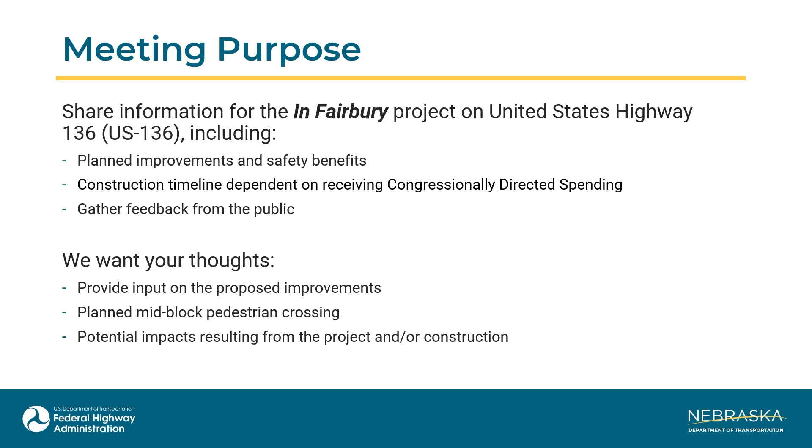Identified as in Fairbury, the proposed project would repair approximately 0.4 miles of concrete pavement along US 136, starting just west of the viaduct over the Union Pacific Railroad and extending east to just beyond the intersections of US 136 and Tilden Street. No work would be done on the railroad viaduct.

It would also reconstruct approximately 1.2 miles of US 136 as a 3-lane roadway starting just east of Tilden Street to just west of L Street. The 3-lane section would consist of a center 2-way left turn lane and an eastbound and westbound through lane. Construction may begin and/or end approximately 500 feet ahead of or beyond the actual project limits to accommodate transitioning the pavement.

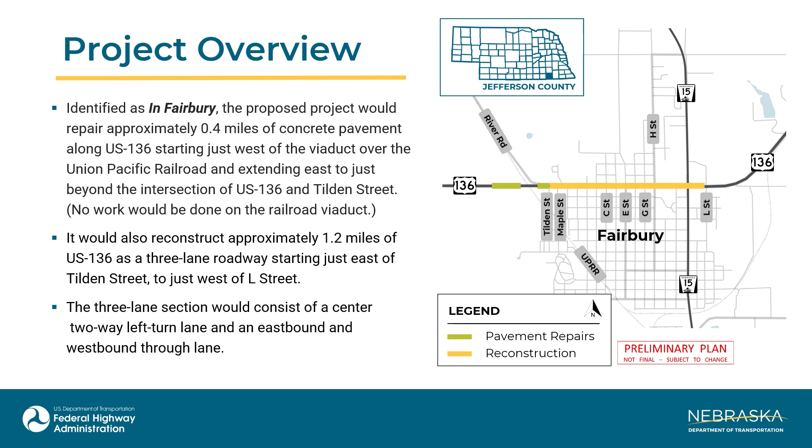The purpose of the proposed project is to preserve the transportation asset, improve the reliability of the transportation system, and perpetuate the mobility of the traveling public. The need for this project is based on the current condition of the roadway.

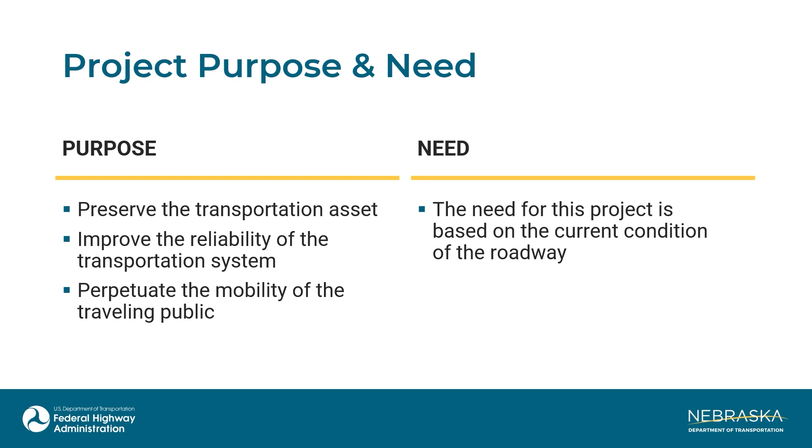We are now in the public engagement process, and we want to hear from you. Stakeholder meetings were held this week with a cross-section of Fairbury representatives comprised of the public sector, civic organizations, businesses, and residents on US 136. The comments received are being evaluated as part of the design process.

This public meeting is an important part of the project process. NDOT will evaluate and respond to all public comments received during the comment period, and the project design will be refined as appropriate prior to starting the right-of-way appraisal and acquisition process anticipated in early to mid-2026.

The proposed project would require the acquisition of additional property rights, which could include new right-of-way, control of access, permanent easements, and/or temporary easements. If your property is impacted by this project, you will be contacted by an NDOT representative once the design footprint has been established.

Final design and construction plans are anticipated to be completed by late 2026. Construction is dependent on receiving congressionally directed spending, or CDS. If CDS is received, construction could begin as early as spring of 2027, with completion anticipated by winter of 2027.

US 136 would be reconstructed and reconfigured through Fairbury. A roadway reconfiguration is also known as right-sizing the roadway. It reconfigures travel lanes to provide space for other needs. Currently a 4-lane highway through Fairbury, US 136 would be reconfigured to a 3-lane section with a center 2-way left turn lane, and an eastbound and westbound through lane.

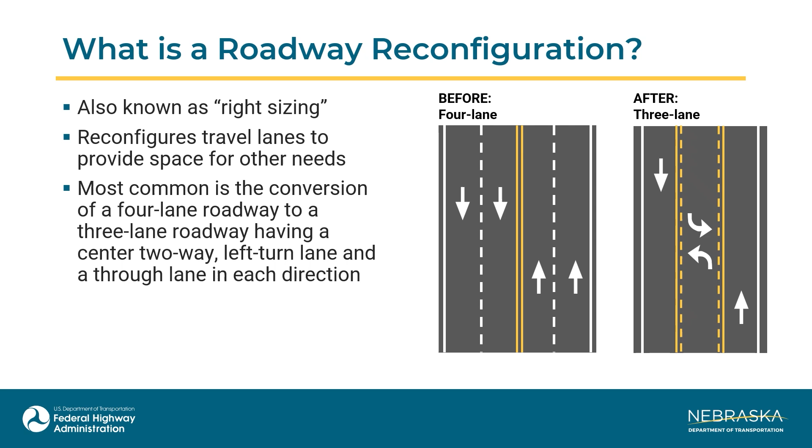Roadway reconfigurations offer several safety benefits. The addition of a left turn lane reduces the risk of rear-end collisions and provides better visibility for those turning left, as shown in the graphic on the screen. A single lane of traffic in one direction also makes it easier for those turning onto US 136 or traveling north or south to find a gap in traffic.

Reconfiguring US 136 to 3 lanes provides space for the addition of sidewalks on both sides of the highway. It also reduces the distance pedestrians must travel to safely cross the highway. National studies performed by the Federal Highway Administration have found that roadway reconfiguration reduces crashes by up to 47%.

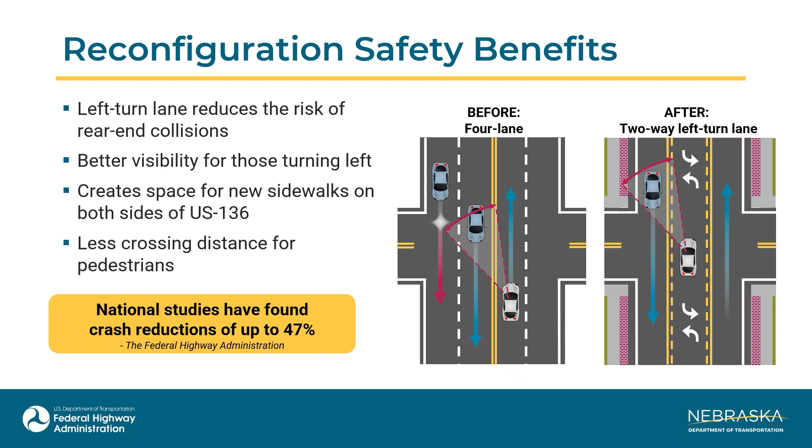Next, we'll be walking through the proposed improvements for US 136, beginning with the typical section. Typical sections are a cross-section or a driver's perspective when looking at the roadway. This slide illustrates the proposed roadway reconfiguration from the existing 4-lane section with a raised median to a more efficient 3-lane section. It includes a single lane in each direction with a dedicated 2-way center turn lane, which enhances traffic flow and safety for turning movements. There will be no shift to the existing highway centerline.

The existing US 136 layout includes 2 travel lanes in each direction and a 15-foot raised median totaling 66 feet in width. The proposed redesign utilizes the existing roadway footprint while improving functionality. Importantly, this reconfiguration allows for the addition of sidewalks on both sides of the highway, along with an imprinted concrete buffer space, improving pedestrian accessibility and safety. The proposed design represents a more balanced use of space that provides safety benefits to both drivers and pedestrians.

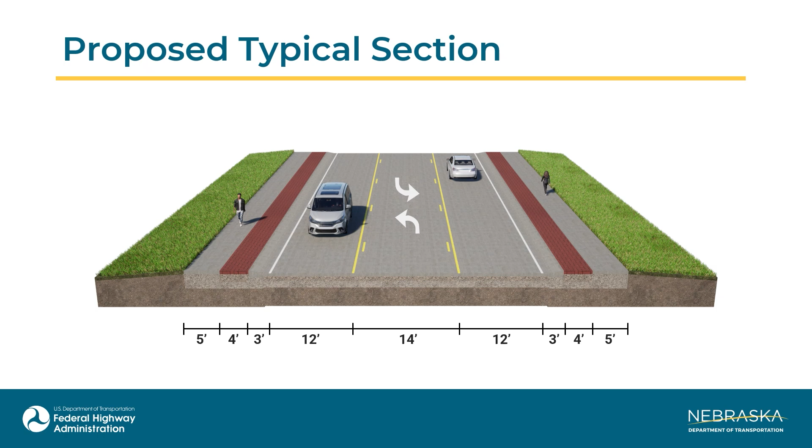Next, let's walk through the detailed improvements for the reconstruction of US 136 beginning at the west end of the project. From Tilden Street to Elm Street, the roadway would be reconstructed on the existing alignment and reconfigured to be a 3-lane section with 1 lane in each direction and a center turn lane. Limits of new pavement are shown in gray. New sidewalks are shown in pink and would be constructed on both sides of the highway starting at Maple Street and extending east to L Street.

Some properties with multiple access points onto US 136 would have driveways consolidated or removed. These locations are identified with an X on the map. Locations with limited visibility have been identified for driveway consolidation to improve sight distance. Consolidating direct access points onto US 136 also helps to minimize potential conflict points.

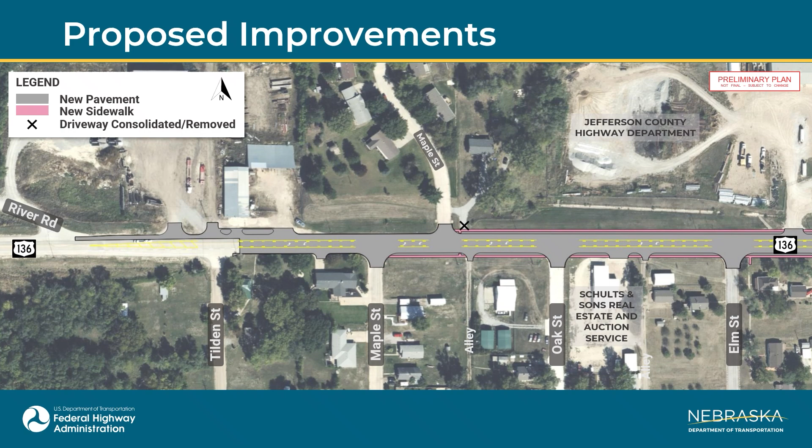East of Elm Street to west of D Street, the 3-lane section would continue on the existing alignment. New sidewalks would be added to both sides of the highway through this section. Intersections and driveway approaches would be reconstructed as needed. Storm sewer inlets throughout the corridor would be reconstructed to improve roadway drainage.

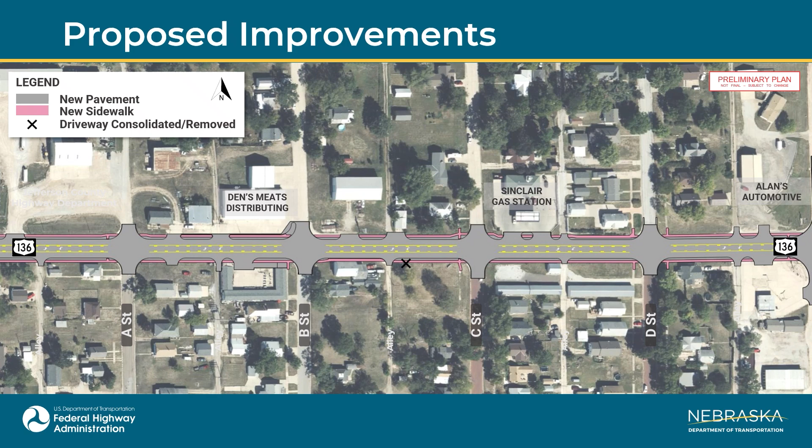East of D Street, the existing raised median would be removed to make room for the 3-lane sections and sidewalks on both sides of the highway. Between D Street and F Street, the US 136 vertical profile, or grade, would be raised approximately 18 inches at the intersection with E Street to meet current sight distance requirements. A new crosswalk between G Street and H Street would be installed. We will discuss the crosswalk in greater detail later in this presentation.

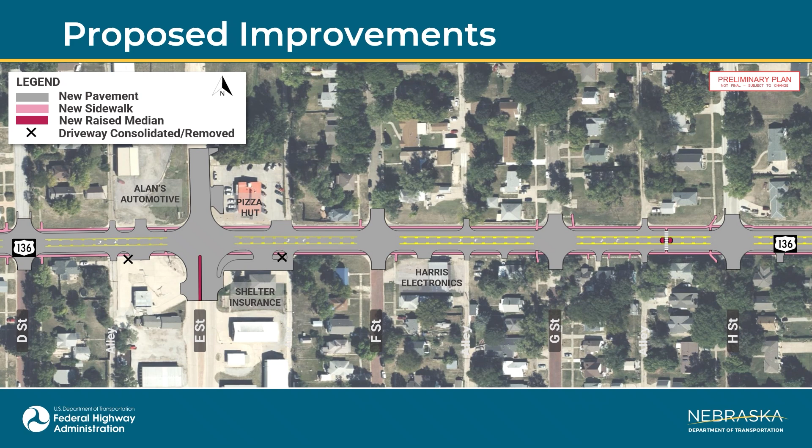From H Street to the junction with Nebraska Highway 15, referred to as N15, the existing raised median would be removed and the proposed 3-lane roadway would be constructed on the existing alignment. Sidewalks would be constructed along both sides of US 136. New raised medians are shown in red. Raised medians would be reconstructed on US 136 at the junctions with N15 to increase safety by separating conflicting traffic movements at the intersection.

McNish Park borders the south side of the project between H Street and J Street. Minor right-of-way impacts are anticipated for culvert work. The park would remain open throughout construction. Section 4(f) of the U.S. Department of Transportation Act of 1966 requires a federal agency to consider the effects of actions on publicly owned parks and recreational lands. NDOT anticipates the project will not adversely affect the activities, features, or attributes of the park. Public comments regarding the potential impacts to McNish Park are being accepted at this public meeting.

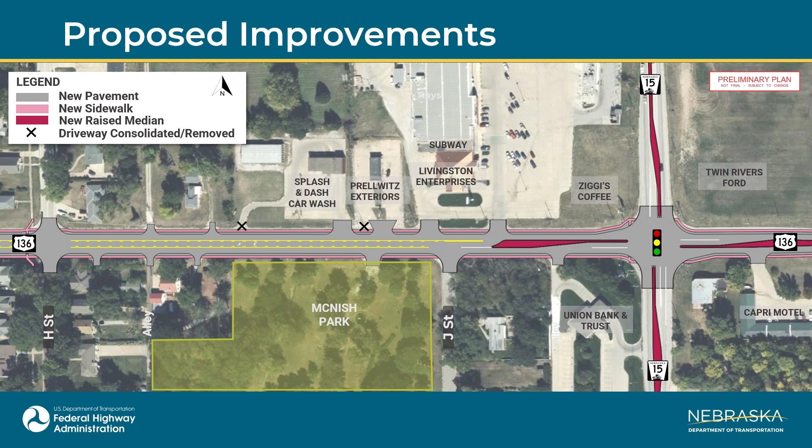The existing raised median along N15 would be removed to allow for the intersection of N15 and US 136 to be phased construction, building half of the roadway at a time. After the construction of the intersection, new raised medians shown in red would be constructed at the locations where the previous raised median had been removed. The project would reconstruct US 136 to the west side of L Street, where the roadway tapers down to meet the existing 2-lane roadway section.

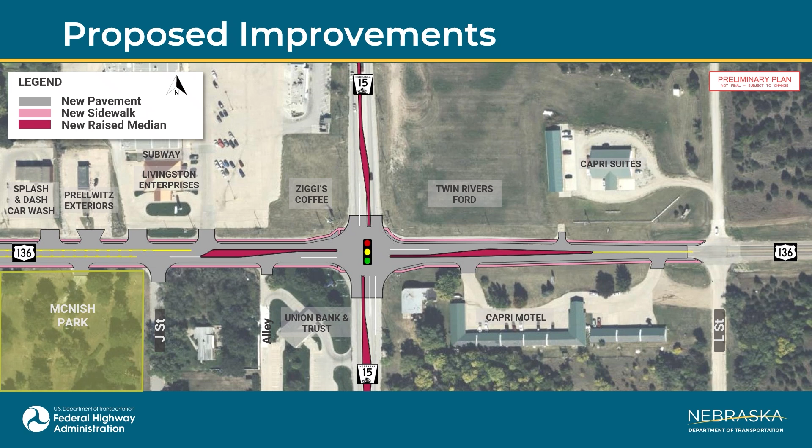Project construction is dependent on receiving congressionally directed spending, or CDS. If CDS is received, construction could begin as early as spring of 2027, with completion anticipated by winter of 2027. During construction, traffic on US 136 and N15 would not be detoured. 1 lane of traffic in each direction would be maintained. Construction would be completed in 3 phases, 1 lane at a time, beginning on the south as shown in red. We'll share more about each phase of construction in the following slides.

Not more than one of the following intersections would be closed at the same time: Maple Street, C Street, E Street, and H Street. Reconstruction would be limited to approximately 4 segments. Local vehicular and pedestrian traffic would be able to cross the highway at intersections not under construction. Access to businesses and residences would be maintained but may be limited at times.

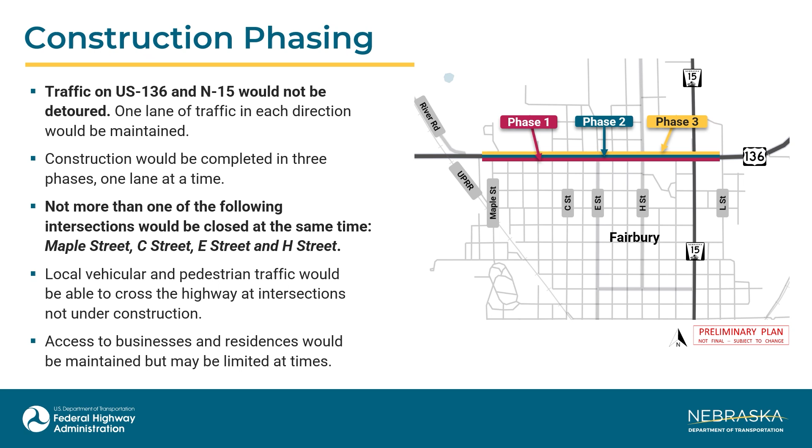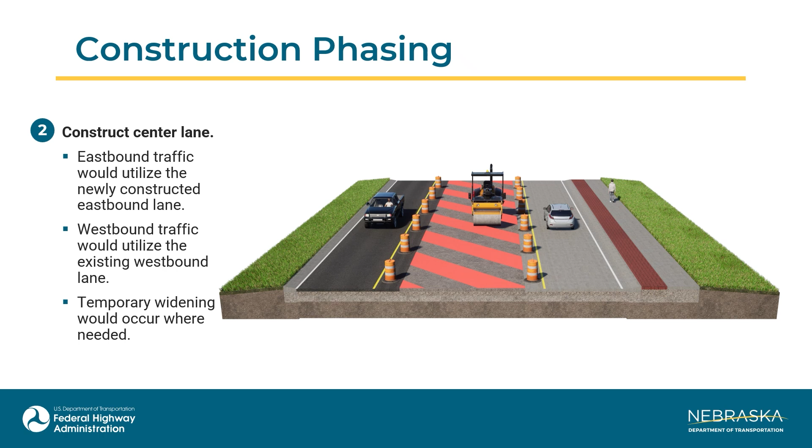Phase 1 would construct the eastbound or south lane of US 136 and the adjacent sidewalk. 1 lane of traffic in each direction would utilize the existing westbound lanes. Temporary widening of the highway would occur to accommodate traffic where needed. Phase 2 would construct the center lane of US 136. Eastbound traffic would utilize the newly constructed eastbound lane. Westbound traffic would utilize the existing westbound lane. Temporary widening of the highway would occur to accommodate traffic where needed. Phase 3 would construct the westbound or north lanes of US 136 and the adjacent sidewalk. One lane of traffic in each direction would utilize the newly constructed eastbound and center lanes.

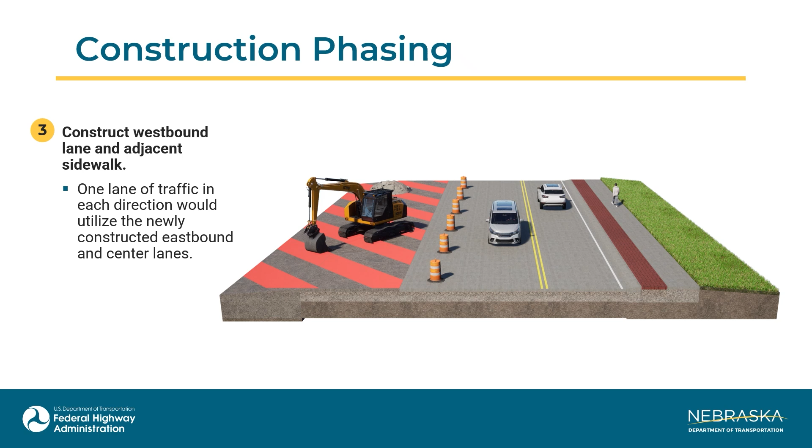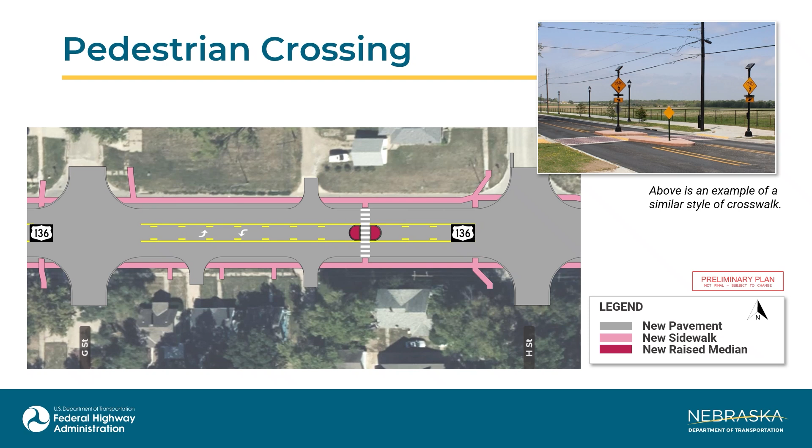There is an existing crosswalk on the west side of the G Street intersection. The City of Fairbury has reported that H Street is also a frequently used crossing. A mid-block crosswalk between G Street and H Street would be built with a rectangular rapid flashing beacon sign, referred to as an RRFB. The crosswalk signs, located on both sides of the street and in the center median, would have lights that flash when activated via a button. These flashing lights help to bring attention to look out for pedestrians in the crosswalk. This new mid-block crosswalk would still allow turning movements from the center lane of US 136 at both G Street and H Street.

Let's wrap up by recapping the preliminary project schedule. Feedback received from the public comment period will be incorporated as appropriate as we advance to final design. Final design and construction plans are anticipated to be complete by late 2026. Construction is dependent on receiving congressionally directed spending, or CDS. If CDS is received, construction could begin as early as spring of 2027, with completion anticipated by winter of 2027.

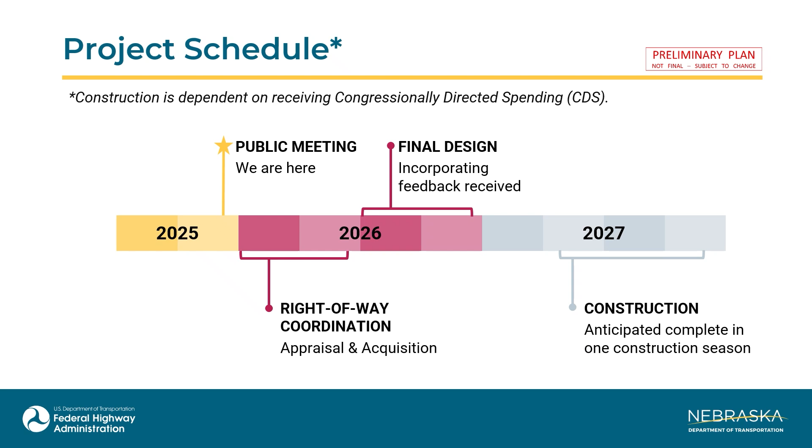NDOT wants to hear from you. There are multiple ways you can provide your comments and input. Visit the project webpage and submit a comment form at ndot.info/13476. By U.S. mail to Sarah Fisher, NDOT Public Involvement, P.O. Box 94759, Lincoln, Nebraska 68509-4759, or by email or phone to sarah.fisher@nebraska.gov. Phone number is 402-479-3832. All comments are requested by December 19, 2025, to be included in the project record.